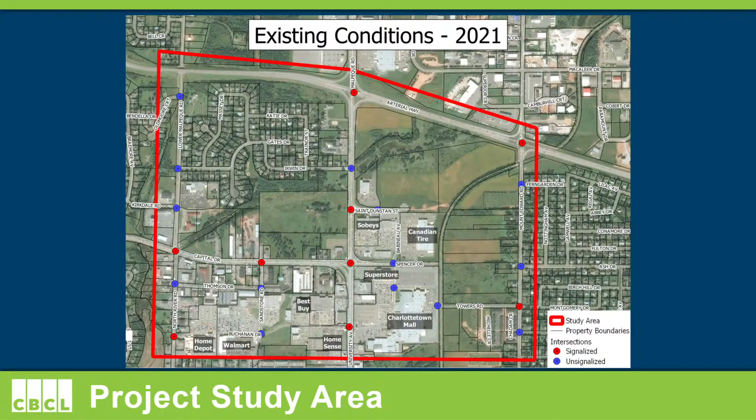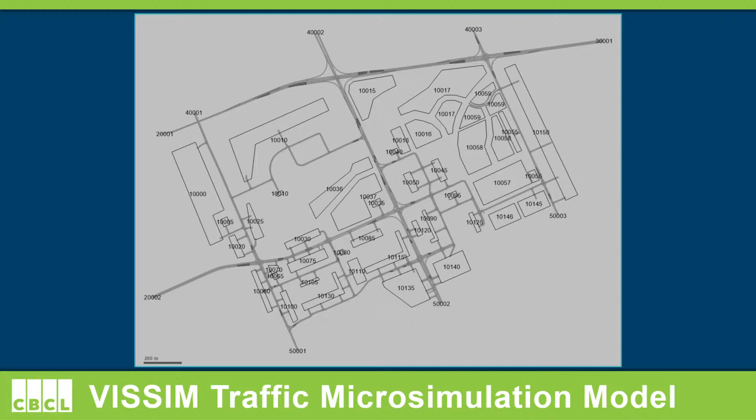So the main part of this plan was to look at traffic and traffic demands through the study area, through the development of a detailed, comprehensive traffic microsimulation model using software called VISSIM. This is just to highlight an overview of what that model looks like. If you pull it up on the screen, it shows all of the roadways in the area, all the driveways—there's quite a few different inputs: roadways and streets, driveways, all the intersections, all the different traffic controls, traffic signals, stop signs, etc.

Left and right turning lanes at the intersections, lane geometries, different ramps and such, crosswalks, pedestrian facilities as well, such as crosswalks, sidewalks, transit, any bus stops that are out there, and the transit routes were part of it as well. For the study, we looked at 3 different time of day scenarios: weekday AM and PM peak periods, morning and afternoon, as well as Saturdays. As we know, it's a heavily congested area—it's an intense retail and commercial area, so Saturdays are pretty busy.

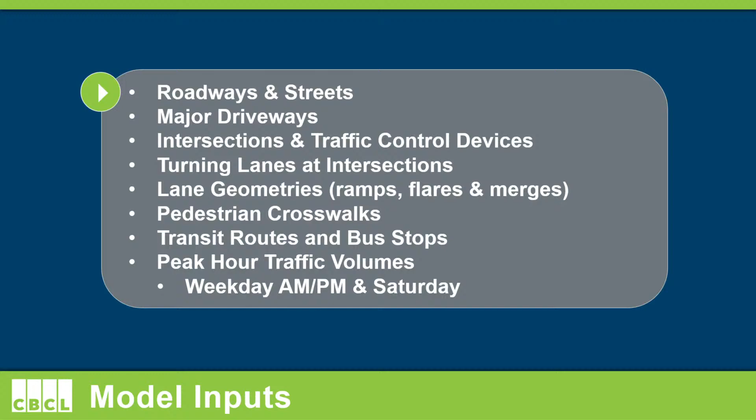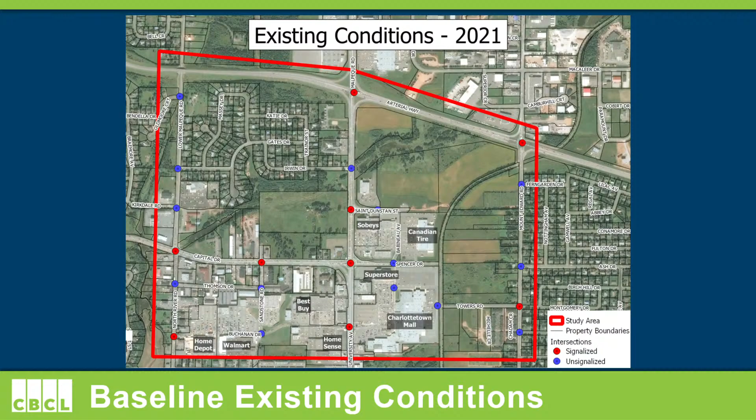This is basically the same slide I showed a second ago, but it gives an overview of the existing streets out there today. You can see all the intersections included in the study highlighted in red or blue. Signalized ones are in red, and unsignalized stop-sign controlled intersections are in blue. We included a couple of intersections at the Charlottetown Mall as well, some internal intersections next to the trail at Towers Road, and over next to the Superstore.

Alex talked about the different properties, the landlocked areas. This slide shows some highlighted properties here. Some are already developed or just approved, north and south of Towers Road. We have the Sherwood Greens development well under construction - much of it's completed, and the apartment building there is still under construction today. South of Towers Road, as well as Sherwood Crossing immediately to the north.

As part of this study, we looked at two future development horizons, basically 10 and 20 years out, 2031 and 2041. So we had to make certain assumptions as to what lands might be developed in these time frames and how they would be developed, what kind of land uses might be coming down the road.

There's also a property opposite Ferngarden, with a new roadway in there - I think it's St. Martha's Court. You can see the areas shaded in that light orange color we assumed would be residential. The areas shaded blue would also be developed by 2031, and we assumed those would be retail or commercial in nature. That includes the property adjacent to Malpeque Road and the bypass intersection, as well as a couple of properties between Princess Auto and Canadian Tire.

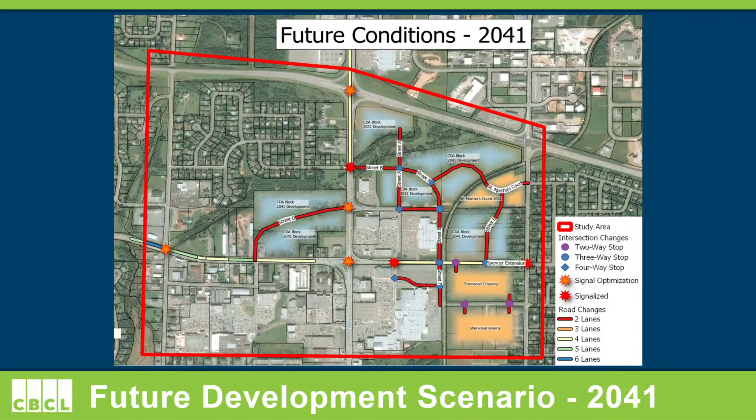I'm not going to spend too much time on this slide, but it gives you an idea of how we carried it out. For each of those parcels of undeveloped land, we assumed a land use - be it multifamily housing, further retail development, shopping center type development, or what have you.

We assumed a size or density of units per acre, or gross leasable square footage per acre in the case of retail, based on existing density of similar developments in the city today. Based on the number of units or amount of square footage, we were able to estimate the amount of traffic that may be generated by that currently vacant land. So that's what this table outlines.

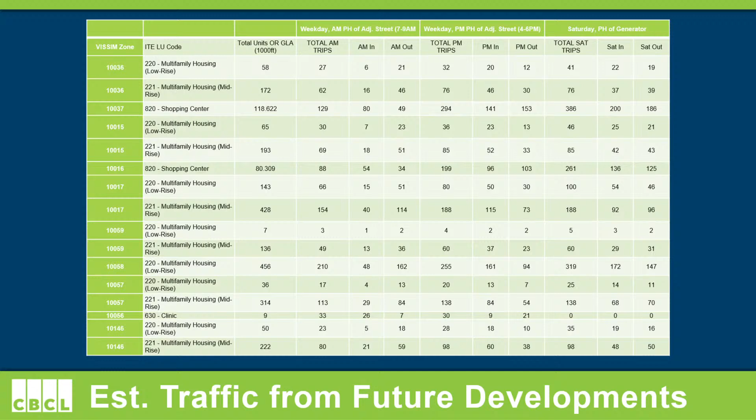I should add, this was done during each of the peak period scenarios - morning, afternoon, and Saturday midday. Once we did that and added that information to the model, this is just a super high-level look at the potential traffic increase.

I should state that these numbers aren't all on one street - they're the number of vehicles you might have within the entire study area street network in a given hour, a one-hour period. So even today you'd see roughly 7,000 vehicles within that street network entering and exiting, and even vehicles moving between two different destinations within the study area, or passing through it - say from Winslow through the study area and heading downtown, for example.

So, future conditions 2031. Back to this slide for a second, because this also shows some potential street improvements, improving existing roadways, and some potential new roadway links that would be needed to support the development of these lands.

These are some roadways that we looked at in the model with these future estimated volumes. They show an extension of Spencer Drive to Mount Edward Road, a new road between Towers Road and Spencer Drive adjacent to the trail, and also potentially extending that road northward and looping into Irwin Drive, which would help open up some of that currently vacant land.

Carrying on to 2041, we're looking at some more new roads. The Peter Pan intersection is kind of in the middle. If you look up and to the left of it, you can see a road that would help open up that property, as well as some additional roads to the north and east of the Canadian Tire area.

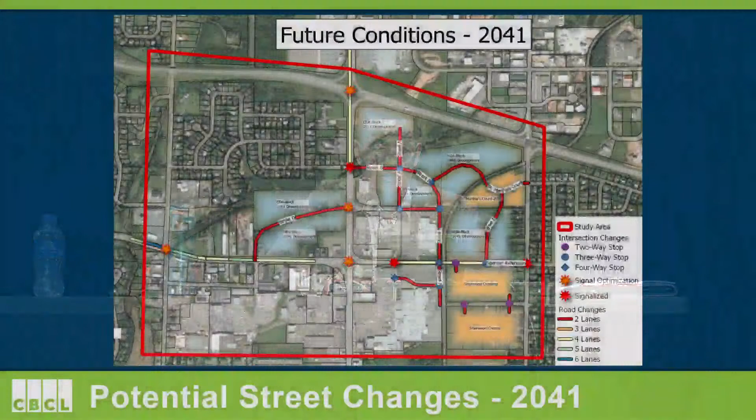There are also some signal upgrades. The orange stars indicate optimizing or capacity increases at some of the existing signals out there, and some widening as well. So we're seeing that by that time, a section of Capital Drive may need to be widened, as well as Spencer potentially, if these volumes came to fruition.

So just to give you a sense, a quick overview of some of the changes to the road network. This is a high-level overview of extending Spencer Drive across the Confederation Trail and tying into Mount Edward Road at Ash.

I think pretty soon an upgrade may be needed to the intersection of Spencer and Babineau, potentially signalizing it. The Peter Pan intersection looks fairly similar to what it does today. The only major change shown here is on the southbound approach heading down from the bypass toward town - right now there's a dedicated right turn lane. We're suggesting that should be a through-right lane, so that through movements can go through there as well, for a total of two lanes, to help improve traffic flow at that location.

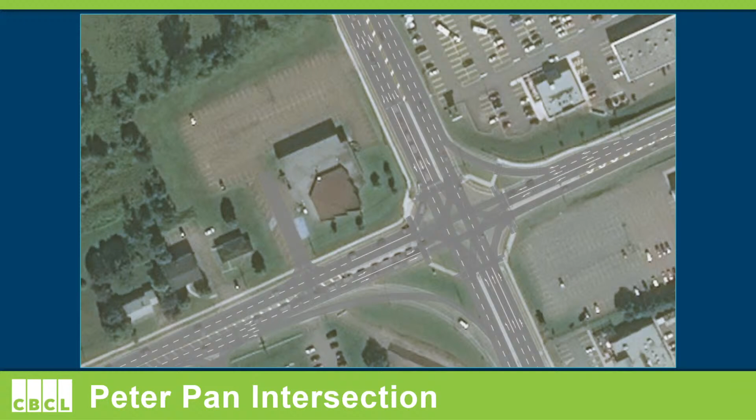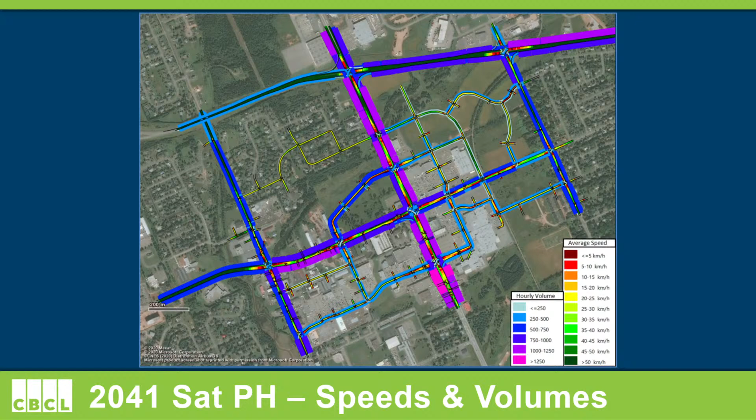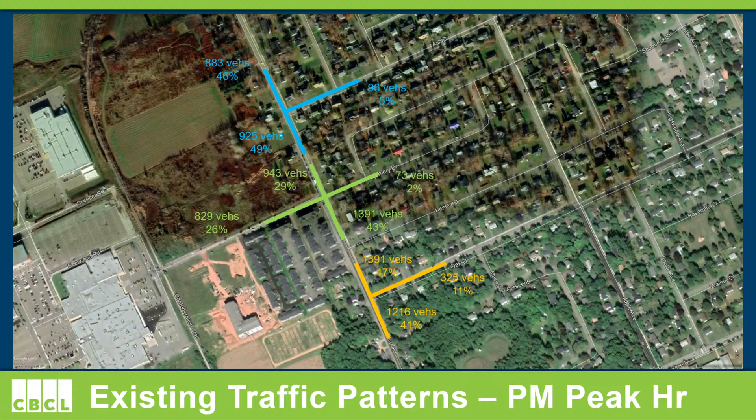So this is PM - again it's about 5% on Ash, 2% on Montgomery, and about 11% of the traffic at the Oak Drive intersection is actually traveling on Oak Drive. And during the Saturday peak, it's similar again.

I also wanted to quickly touch on future roadways that might be - any new roadways and even any existing roadways within the study area - as they pertain to other modes of transportation other than personal passenger vehicle. Because active transportation could play a very large role in helping to reduce the overall traffic demands on these existing and future roadways.

Particularly as there's likely to be quite a bit of residential developed on the Sherwood side of the Confederation Trail, but adjacent to all the commercial area, it would be very helpful if there were other alternate modes of transportation that could be used instead of everybody jumping in their car to drive 2 minutes to go get groceries.

So if there were active transportation, trails, multi-use paths, sidewalks, etc., as well as transit, maybe altered transit routes, enhanced transit service, that would maybe help to reduce some of the future traffic demands and manage that load.

So this is just a quick overview of the types of things that can be done, and I'm sure none of it's rocket science, but complete streets is a term used to describe a street that is designed and built to accommodate all modes of traffic, including pedestrians, cyclists, transit, and other non-motorized modes.

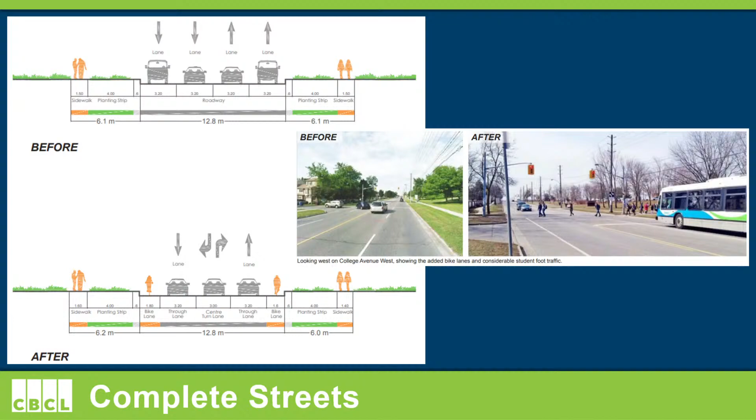Here's a slide where they've retrofitted an existing street - I think it was an existing 4-lane cross-section - and they took it down to what's called a road diet, making a 3-lane cross-section and adding some bike lanes instead of that 4th lane.

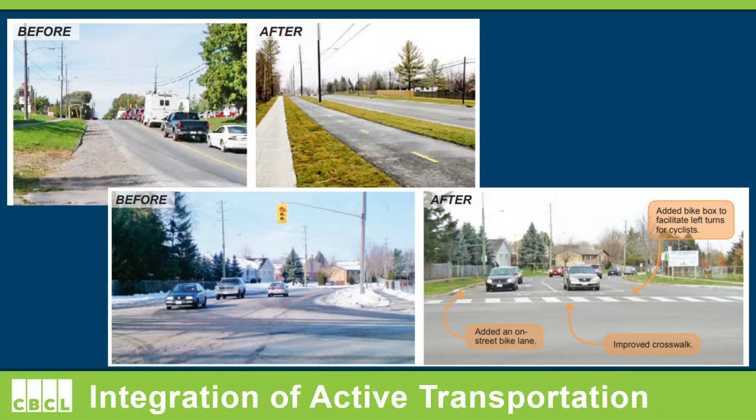Similarly here, in the top left, you can see where there was an existing roadway that just looks like gravel shoulders. They narrowed up the asphalt width and added a bike path and a sidewalk. And then there's also some intersection improvements here as well.

So that concludes my presentation. Thank you for your attention.

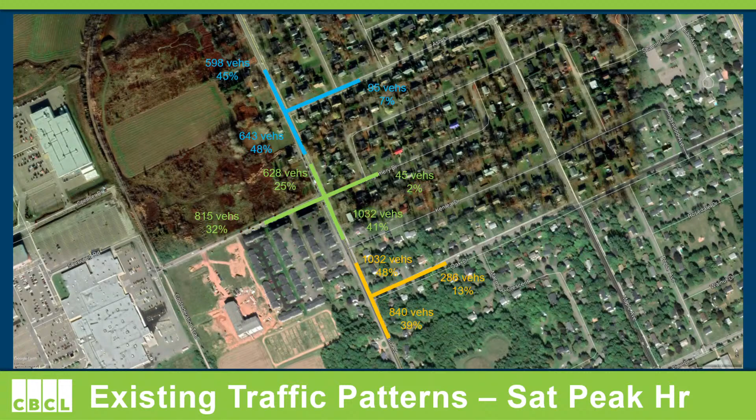One of the main things, I guess I'm hearing a lot of comments about the congestion on Towers Road. Yes, everyone in the room knows how congested it can be during certain times of the week and certain times of the day. So the Spencer Drive extension, the main push for that would be to help alleviate that congestion and to spread it out.

We know there's a lot of traffic that wants to go between the Mount Edward Road corridor and the other side of the Confederation Trail, into the retail areas, the mall, and all the way over to Capital Drive, Walmart, and Home Depot. Right now a huge amount of that traffic cuts through the mall.

Spencer Drive is kind of a natural route. Once it's extended, it becomes that natural path, kind of the main east-west route that connects Sherwood and connects Mount Edward Road to the commercial area and to points beyond. That's the main reason for that road.

When you look at the other side of Mount Edward Road on the residential side, right now there are, I think, between Belvedere Avenue and the bypass, about 10 streets that cut through and come off Mount Edward Road and go into Maple or beyond. We're talking Pine, Oak, Ferndale, Ash, Kenley, Woodlawn, Hillside, and a couple more.

So right now, Towers Road is kind of a key link, and there's a lot of traffic on it that goes in both directions. When folks come out of Towers Road, almost nobody goes straight through to Montgomery and into Sherwood. The numbers demonstrate that, and I think everybody would agree with me, even though Montgomery lines up directly with that road.

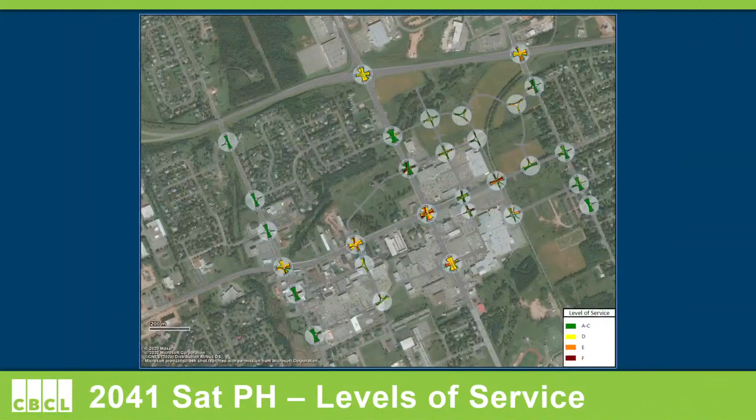We did traffic counts. The weekday traffic counts were primarily done pre-COVID, pre-pandemic. They're mostly from 2019. The Saturday counts were done, I think, generally last June and July, so they were during the pandemic, but they were Saturday traffic. We knew that weekday traffic at that time certainly wasn't anywhere near normal.

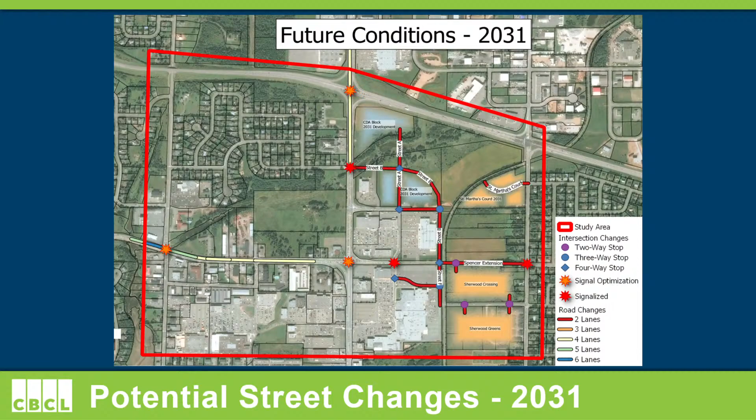Saturday traffic was pretty close, however, because the city has a permanent traffic monitoring station at the Queen's Arms intersection, Capital and North River Road. From monitoring that, we could see traffic plummeted in mid-March of last year, and then slowly over the next few months worked its way back up. At the time we did those counts, they were like 95% of normal volumes on Saturdays.

Okay, so that data is 2 years old, and some of it for Saturday is done during the pandemic. Correct. So I would suggest you could throw those in the garbage and start afresh. And if you're going further, you should be monitoring Mount Edward Road, Ash, and all the roads going onto Mount Edward Road with an actual count, not an assumption or an estimation.

We did, so to follow up, sir, we did do counts along Mount Edward Road at the bypass, Fern Garden, Ash, Towers, and Oak, which are the 5 intersections adjacent to the study area.

And when did you do them? As I just said, some of them were 2019, the weekday ones were 2019, and the Saturday ones were mid-2020. During COVID with no summer traffic, and your data is 2 years old. So I would suggest that you have to revamp those and do them again. Fair enough.